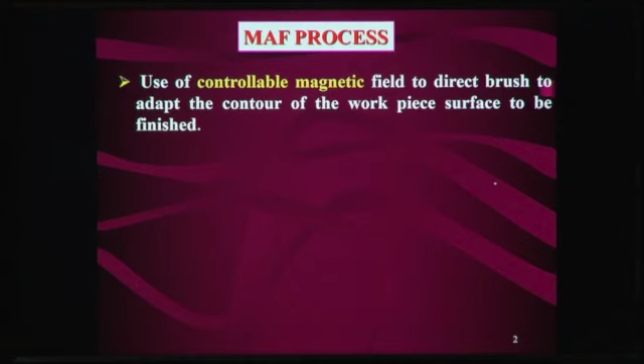In MAF process, a controllable magnetic field is used to direct the brush to adapt to the contour of the workpiece surface to be finished, and the nature of the brush is flexible. This flexible brush means it can polish any kind of complex freeform surface, and can access surfaces where conventional tools are hardly applicable, such as inside pipes or bendings.

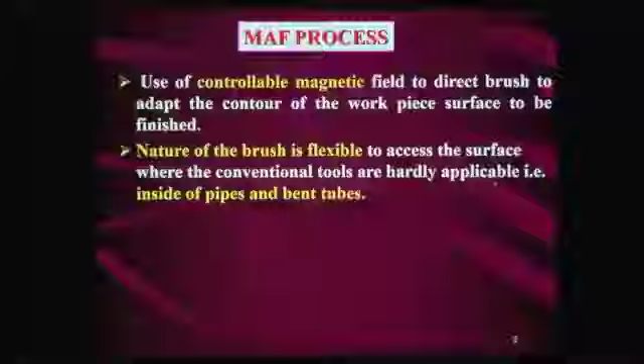For example, if you want to polish the internal surface of a tube, any conventional polishing process is difficult to use there or in any inaccessible areas. So in those inaccessible areas, a magnetic abrasive finishing process can be used to polish.

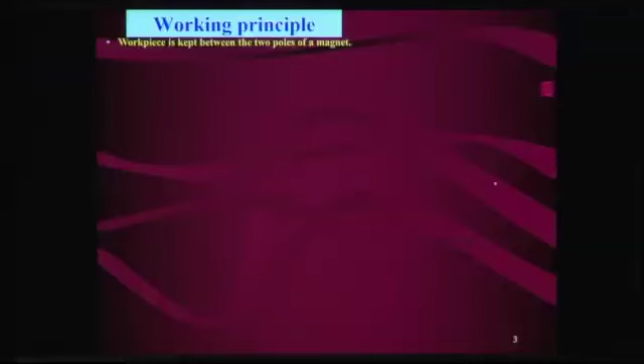So what is the working principle? The workpiece is kept in between the two poles of the magnet. The cutting force is controlled by the magnetic field generated by an electromagnet, or you can use a permanent magnet. Nowadays very high strength permanent magnets are available, like neodymium iron boron, and using this with the highest grade, you can get up to 0.6 Tesla magnetic field.

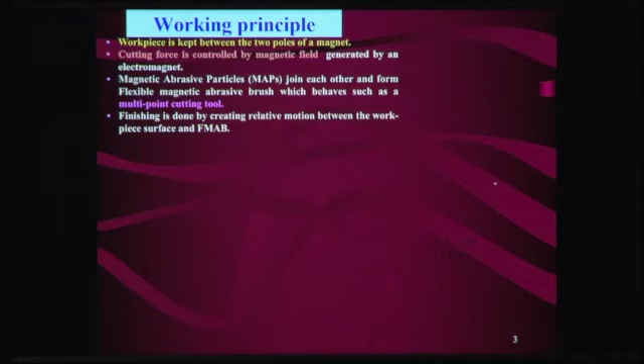So you can use an electromagnet or a permanent magnet. The advantage of an electromagnet is that by changing the current, you can change the magnetic field, which is not possible with permanent magnets. These magnetic abrasive particles join each other and form a flexible magnetic abrasive brush, which behaves as a multi-point cutting tool, and finishing is done by creating relative motion between the workpiece surface and the flexible magnetic abrasive brush.

These flexible magnetic abrasive particles are actually iron particles, 99.9% pure iron particles, and abrasive particles are mixed with these iron particles to make a homogeneous mixture. Some binding material, like binding fluid or grinding fluid, is mixed to bind these abrasive particles with the iron particles.

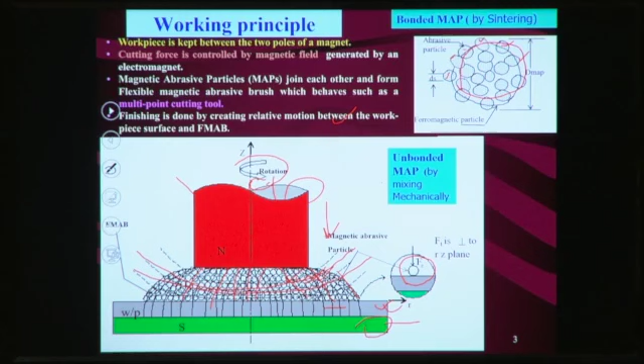There are different configurations of the magnetic abrasive finishing process. I already told you that either cylindrical workpieces or flat workpieces are generally polished by this process. Suppose we take a cylindrical workpiece here - this is the north pole, and its shape is hemispherical, considered to generate a uniform magnetic field on the workpiece surface.

These lines are magnetic lines of force, and perpendicular to them are the magnetic equipotential lines. So these are the magnetic equipotential lines. This is the north pole of the magnet, and this is our workpiece.

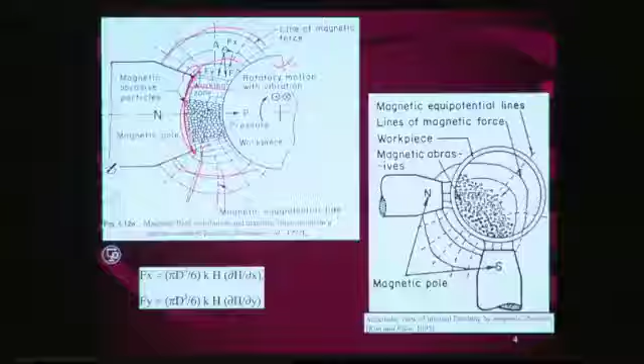Now to give the rotating motion, this workpiece is rotated with a certain high RPM. In between this north pole and the workpiece, these magnetic abrasive particles are kept. When the magnetic field is applied between the north pole and the workpiece, because of this application, the iron particles form chains along the magnetic lines of force. It creates a normal pressure into the workpiece surface, shown here as pressure P.

Because of this relative motion between the workpiece and the magnetic particles, it will remove the surface undulation from the workpiece surface. Consider a magnetic abrasive particle here - there are two forces: one is Fx, tangent to the line of magnetic force lines, and another is Fy. Because of Fx, it will indent and penetrate into the workpiece surface, and because of Fy, it will remove the surface undulations from the workpiece surface.

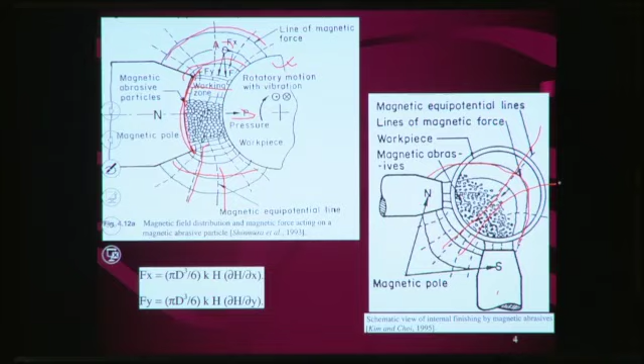This is another configuration here. North pole and south pole of the magnet are kept perpendicular to each other. This is the magnetic force lines, and these are the magnetic equipotential lines. There are other configurations also.

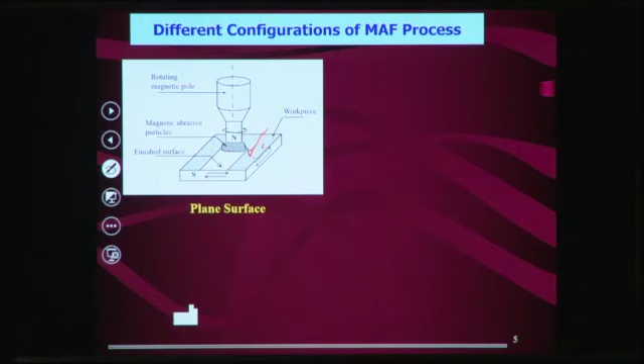In this configuration, flat workpieces are polished. This is the north pole of the magnet, and this workpiece is a magnetic workpiece, so south pole is generated into the workpiece surface. In between this north pole and south pole, we have kept magnetic abrasive particles. The total workpiece is given X and Y movement to polish the entire workpiece surface.

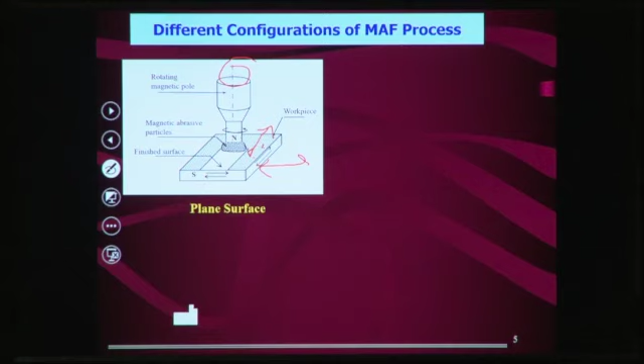At the same time, this magnet is also rotated with a certain RPM to give relative motion between the abrasive particles and the workpiece surface. This is another configuration of the magnetic abrasive finishing process.

Here a cylindrical workpiece is polished. This is the south pole and this is the north pole of the magnet, and this is the workpiece. It is rotated with a certain RPM, and these are the magnetic abrasive particles.

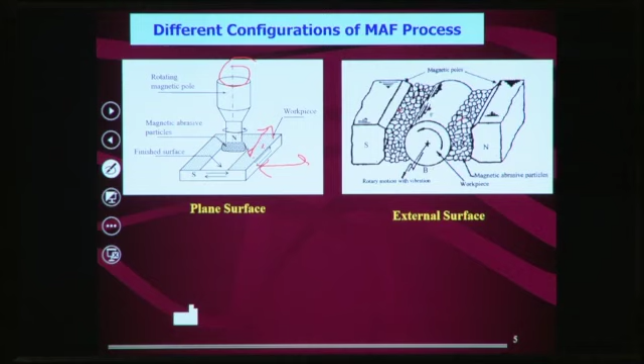There is another configuration here using an electromagnet - north pole and south pole are perpendicular to each other. Here we are polishing the external surface of this workpiece, and also the external surface of this cylindrical workpiece. This kind of magnetic abrasive finishing process can be retrofitted into a lathe machine by fixing the workpiece into the tailstock and headstock, and another arrangement for fixing the magnets.

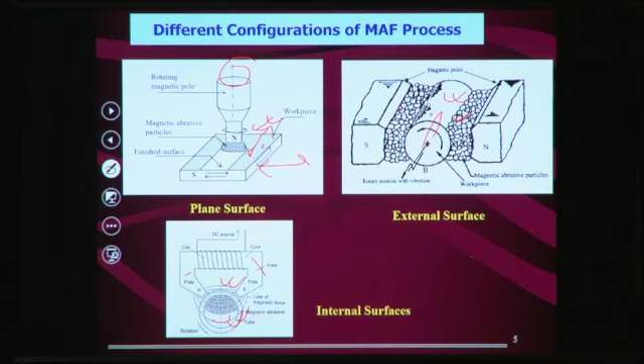In this configuration, the internal surface of this cylinder is polished by the magnetic abrasive finishing process. Here also the workpiece is rotated with a certain RPM, and the north pole and south pole are fixed here. There are different other configurations too.

Here 4 magnets are kept just outside the workpiece. This work was done by Hitomi et al., where ceramic pipes are polished - specifically the internal surface of the ceramic pipes. Here also the North Pole and South Pole are perpendicular to each other.

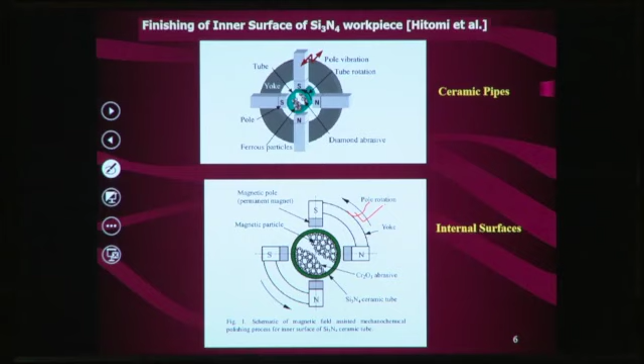This yoke is connected to increase the magnetic field, and this total yoke along with the permanent magnets is rotated. In this case permanent magnets are used, whereas in the earlier case electromagnets were used. These ceramic pipes' internal surfaces are polished by this magnetic abrasive finishing process.

Why is rotation of these abrasive particles in the brush important? Rotation gives relative motion between the abrasive particles and the workpiece. Without this rotation there would not be any tangential force, only normal force. This normal force is required for indentation or penetration into the workpiece surface, and because of rotational motion, a tangential force is generated. This tangential force is required for

cutting the surface undulations. The force required to remove material is given by shear tau, the shear stress of the workpiece material, multiplied by AP, the projected area of penetration of the abrasive particles into the workpiece surface due to normal indentation force. This gives the required force for polishing to take place. When this required force equals the tangential force because of rotation, equilibrium condition occurs, and finishing is about to start.

When the tangential force is greater than the required shear force, shearing or cutting action will take place and material removal will occur. But when the required force is greater than the applied tangential force, no cutting action will take place. So these are the three different conditions.

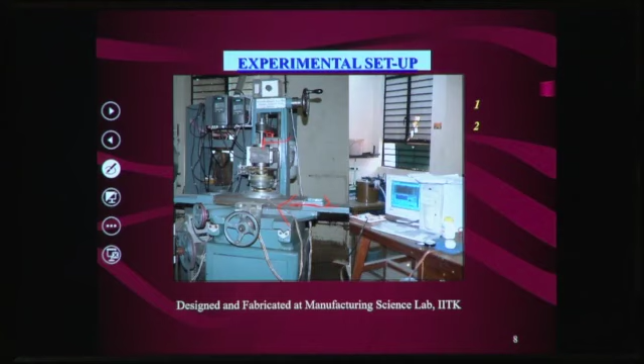This wheel is used for maintaining the gap between the magnet and the workpiece. A timing belt is used so that there is no delay or friction between this shaft and the motor shaft. This is the spindle. The slip ring is used to give current to this motor, to give current to this electromagnet.

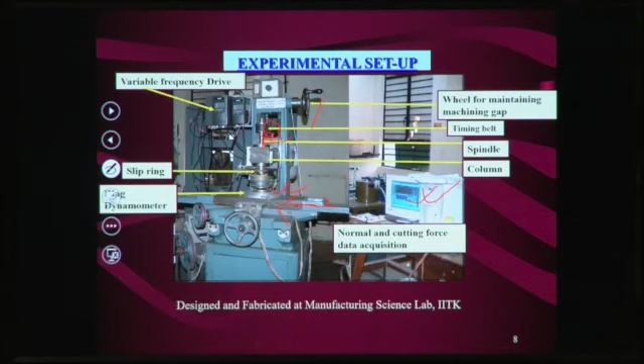There is a dynamometer, a fabricated, custom-made dynamometer, used to calculate the normal force and the tangential cutting force. There is also a data acquisition system used for measuring this cutting force, the normal force, and the tangential force.

These are the ferromagnetic particles, iron particles of 300 mesh size, and these are the abrasive silicon carbide particles, with 600 mesh size.

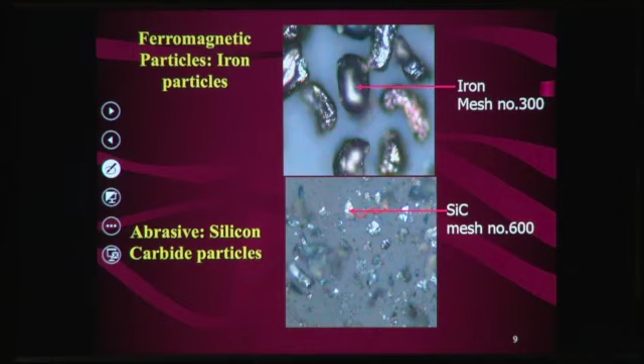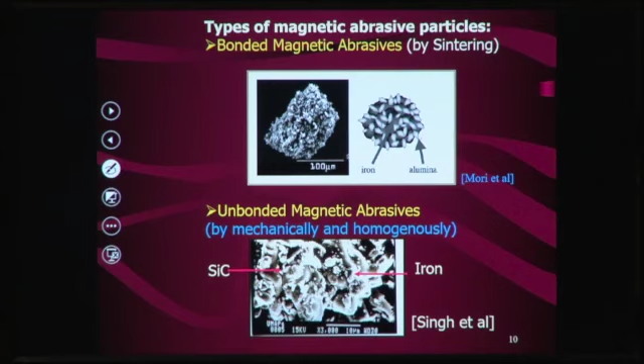Types of magnetic abrasive particles have already been shown. This is the bonded type magnetic abrasive particles, and this is the unbonded type. In the unbonded type, these abrasive particles and magnetic particles are homogeneously mixed with grinding oil.

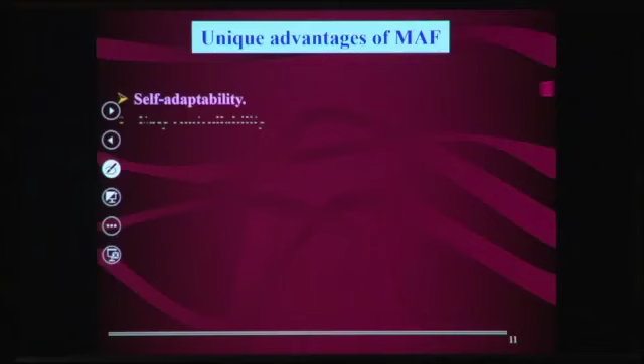What are the unique advantages of this magnetic abrasive finishing process? Self-adaptability is one of the advantages, meaning you can polish any kind of complex free-form surface. The magnetic abrasive fluid will take the shape of the surface to be polished, which is why it is called self-adaptability.

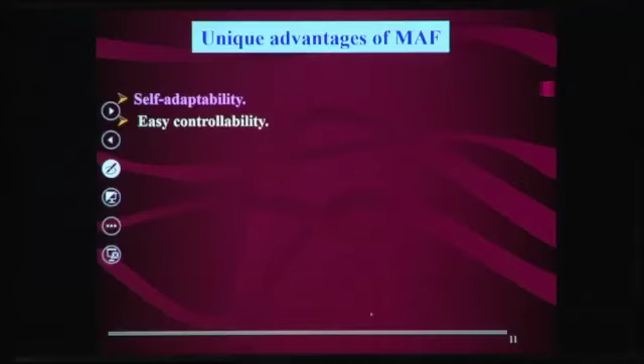The bonding strength of these magnetic abrasive particles is controlled by magnetic force. By changing the current to the electromagnet, the strength of the bonding of magnetic abrasive particles can be changed, giving easy controllability and surface finish up to the nanometer level.

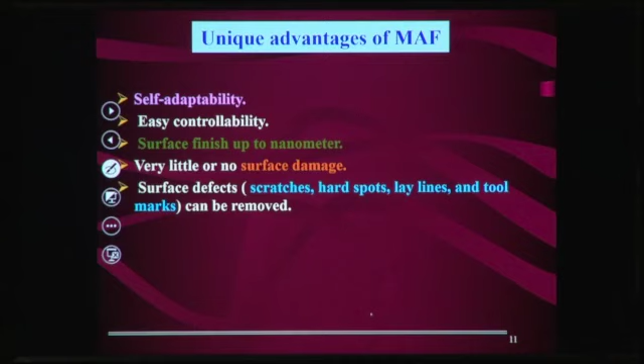From this process you can get surface finish up to the nanometer level, with very little or no surface damage, because whatever heat is generated is very minimal in the magnetic abrasive finishing process. Surface defects like scratches, hard spots, lay lines, and tool marks can also be removed by this process.

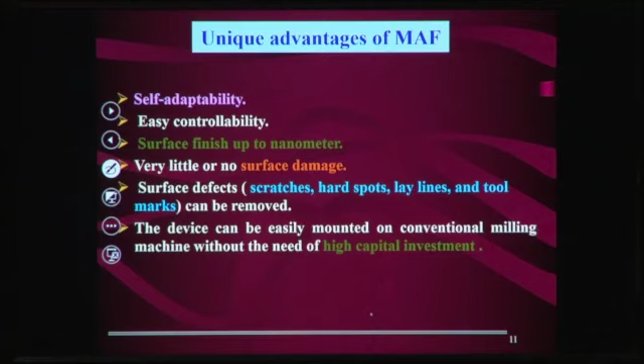These devices can easily be mounted on a conventional milling machine without the need for high capital investment. So any kind of milling machine, grinding machine, or lathe machine can be converted into a magnetic abrasive finishing process. This process actually started in the USA.

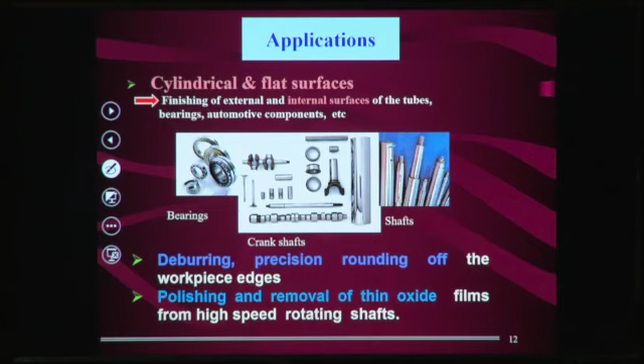Cylindrical or flat workpieces can be polished. Finishing of external or internal surfaces of tubes, bearings, and automotive components can be done. These are crankshafts, bearings, and shafts. External or internal surfaces of shafts can be polished by this process.

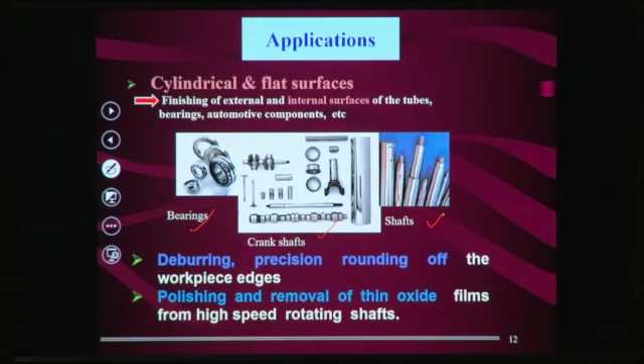Other applications include deburring, precision rounding off workpiece edges, and polishing and removal of thin oxide films from high-speed rotating shafts, all of which can be done by this magnetic abrasive finishing process.

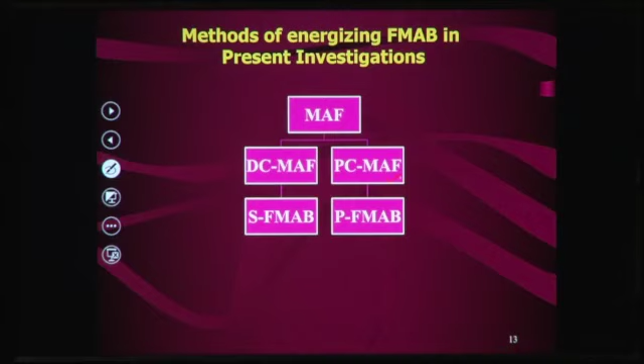Regarding the method of energizing flexible magnetic abrasive finishing in the present investigation, there are two types. In one case, constant DC current is used, called direct current magnetic abrasive finishing, where a static flexible magnetic abrasive brush is generated. In the other case, pulsating DC current is used, called pulsating current magnetic abrasive finishing, or pulsating flexible magnetic abrasive brush.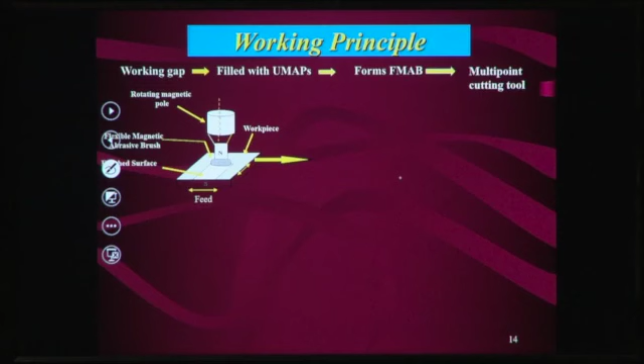You can see this permanent magnet is used here, and electromagnet is used here. In this electromagnet, at the center is the north pole, and at the end is the south pole. Here is the coil - two coils are used for this kind of magnet.

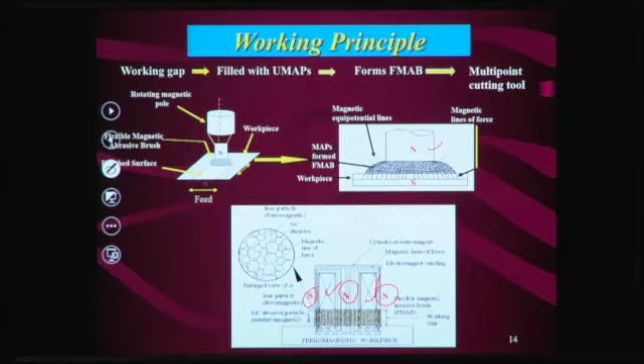Here you can see the magnet, electromagnet here, and this is the workpiece here, and in between this workpiece and electromagnet. So this is the workpiece and this is the electromagnet. Here flexible magnetic abrasive particles are actually kept.

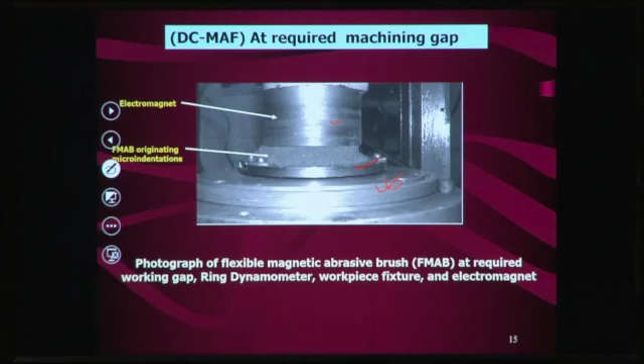Photograph of this flexible magnetic abrasive brush and required working gap, ring dynamometer. This is the ring type dynamometer used. Strain gauge type dynamometer is used for measuring the normal force and tangential force. This is the workpiece fixture and electromagnet. These are the instruments required for analysis and during machining of the magnetic abrasive finishing process.

Surf analyzer is used for measurement of the surface roughness, electronic balance for measuring the initial workpiece weight. Optical microscope is used for seeing the top surface or surface topography of the workpiece. Scanning electron microscope and atomic force microscope are used for seeing the surface profile.

DC power supply is used for the electromagnet. Pulse power supply is also used for the electromagnet. Digital oscilloscope is used to record the pulse, current and voltage. Gauss meter is used to measure the magnetic field in the machining zone, and ultrasonic cleaner is used for cleaning the workpiece.

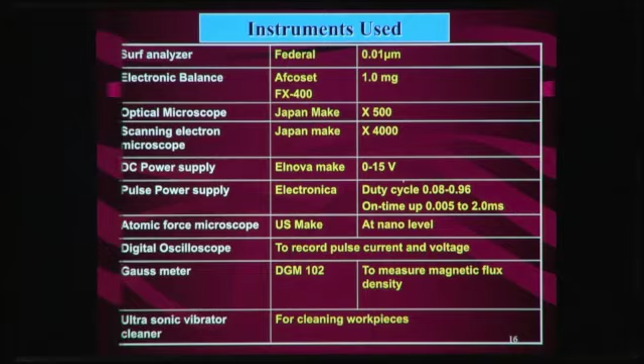Measurement of magnetic flux density: here is the Gauss hall probe of this Gauss meter, kept in between the tool and the workpiece. So this is the workpiece here, this is the tool here. In between this tool and workpiece, this Gauss meter is used.

So it's the exploded view or schematic view. This is the hall probe of this Gauss meter, and this is the finishing zone here. It is used for measuring the magnetic field.

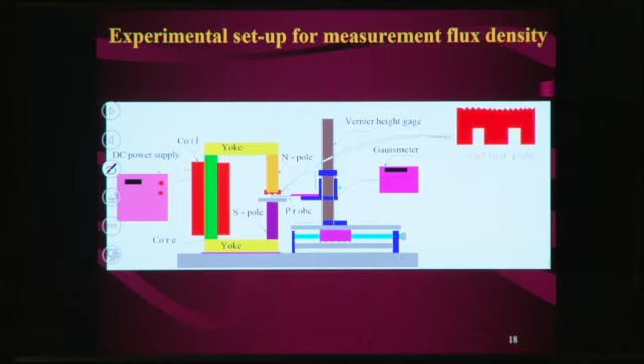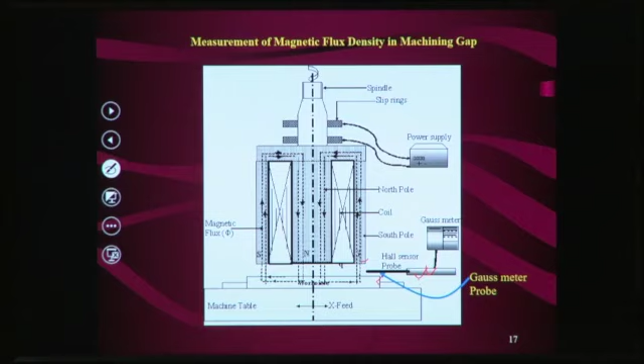With the increase in current, from the center to the outer periphery of this electromagnet, you can see how this magnetic field is varying with the increase in current. With lower current, the magnetic field flux density is less. With higher current, magnetic flux density is more. So with increasing current, the magnetic flux density is increasing at a certain point.

Then with different gap, different magnetic flux density is observed. So when your gap is less, then magnetic flux density will be high. When gap is more, your magnetic flux density will be less.

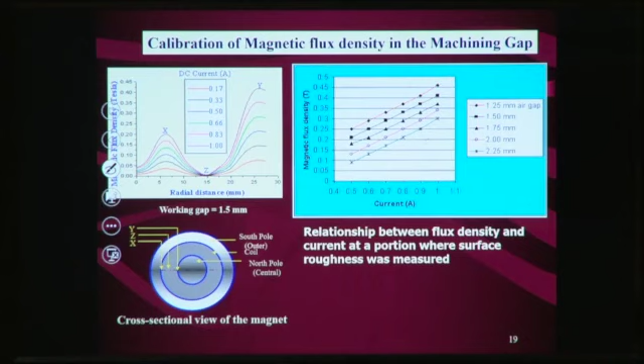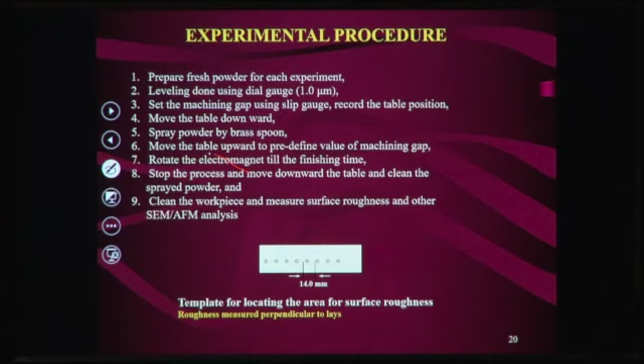Stop the process and move the table downward, clean the sprayed powder and clean the workpiece, then measure the surface roughness using the surf analyzer, and perform SEM and AFM analysis.

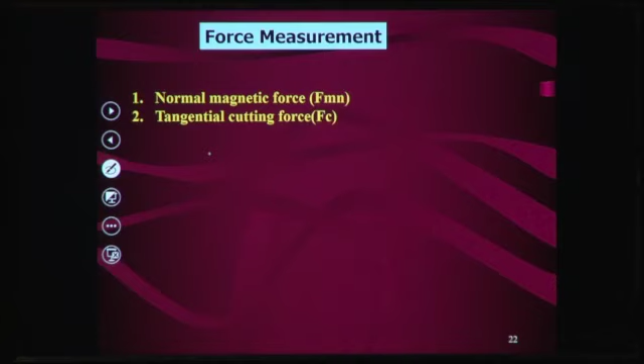Force measurement: there are two forces, one is the normal force, another is the tangential cutting force. This tangential cutting force is responsible for the cutting operation.

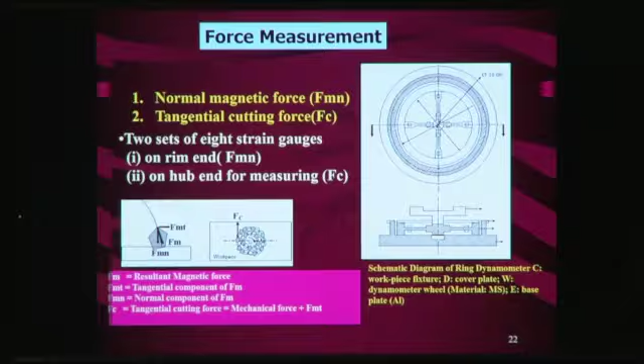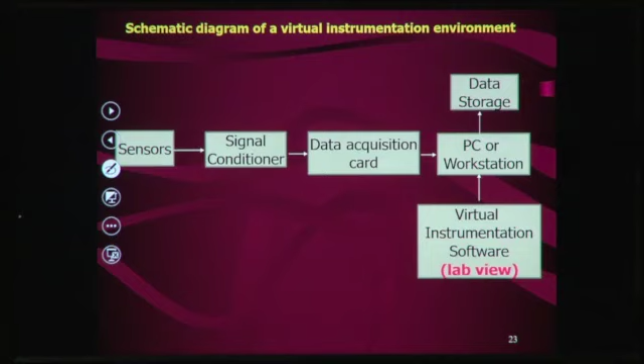The sensor signals go from the signal conditioner to the data acquisition system, then to the PC and data storage, along with virtual instrumentation software LabVIEW. From there, your force is actually measured.

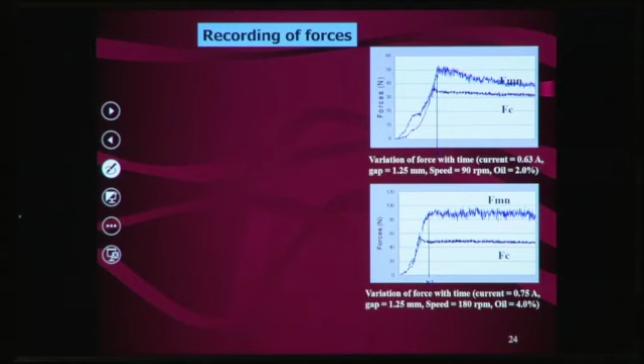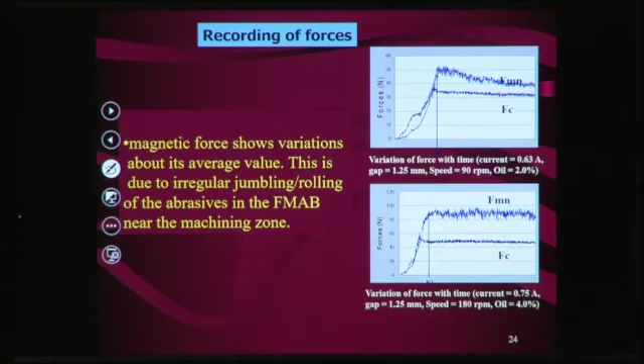For 0.75 ampere current, magnetic force shows variations about its average value, and this is due to the irregular jumbling or rolling of the abrasive in the flexible magnetic abrasive brush near the machining zone.

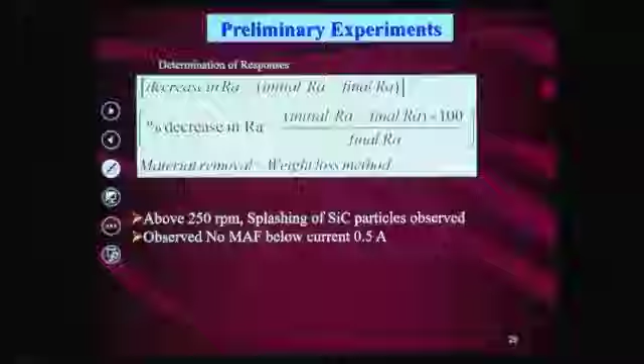Experimentation using static flexible magnetic abrasive brush - preliminary experiment. The responses we calculated are: decrease in RA, which is initial RA minus final RA; percentage change in RA, which is initial RA minus final RA divided by final RA surface roughness multiplied by 100; and metal removal rate, which is the weight loss.

Above 250 RPM splashing of silicon carbide particles are observed at 250 RPM of this magnet, and we observed no magnetic abrasive finishing action below...

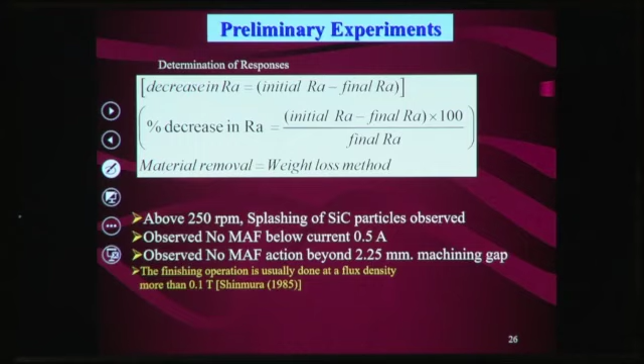We observed no abrasive finishing action below current of 0.5 ampere, and no magnetic abrasive finishing action beyond 2.25 millimeters. So when the gap is more than 2.25 millimeters, there is no magnetic abrasive finishing. The finishing operation is usually done at flux density more than 0.1 Tesla.

These are the parametric results for the magnetic abrasive finishing process. With the increase in magnetic flux density, you can see magnetic abrasive pressure also increases.

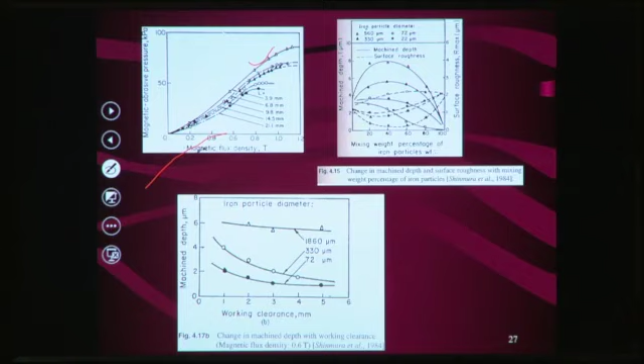Here you can also see the mixing weight ratio. Mixing weight ratio increases with increase in machined depth, which increases with increase in the mixing weight percentage of iron particles.

With the increase in finishing time, initially the finishing rate is very high, and then after that it almost stalls.

What happens is these surface undulations are triangular shape. When the abrasive particles cut the surface undulations, the shape of these triangular peaks becomes plateau. It requires higher force to cut this bigger size plateau. That's why initially surface roughness improvement is very high, but later, because of this bigger plateau, the removal rate and finishing rate reduce with time.

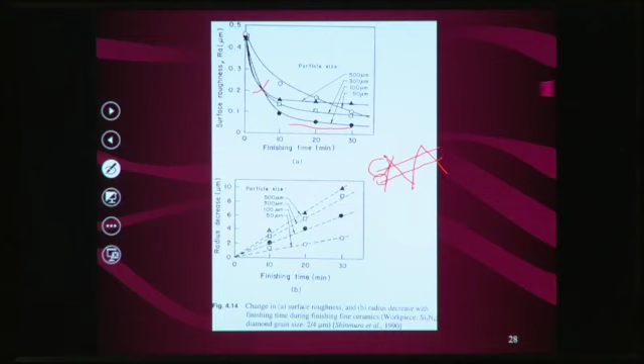Radius of the workpiece decreases with the finishing time.

There are two types of abrasive particles: one is unbonded type and another is bonded type. Bonded type abrasive particles give higher surface finish, but their metal removal rate is less.

In unbonded type abrasive particles, surface roughness improvement is lower, but their metal removal rate is high. So unbonded type magnetic abrasive particles are used for higher metal removal rate, and bonded type magnetic abrasive particles are used for getting higher surface finish.

When magnetic flux density increases, machined depth also increases. If magnetic flux density increases, the abrasive and iron particles will make strong chains, and abrasive particles will be held with a higher force.

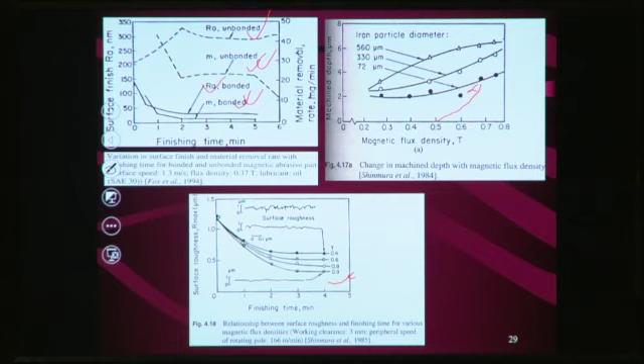With the increase in finishing time, surface roughness also reduces. Initially, the surface finish started on a grinded workpiece with 0.49 micron workpiece surface roughness. After the flexible magnetic abrasive finishing process is carried out on the same workpiece, surface roughness is reduced to 0.28 micron.

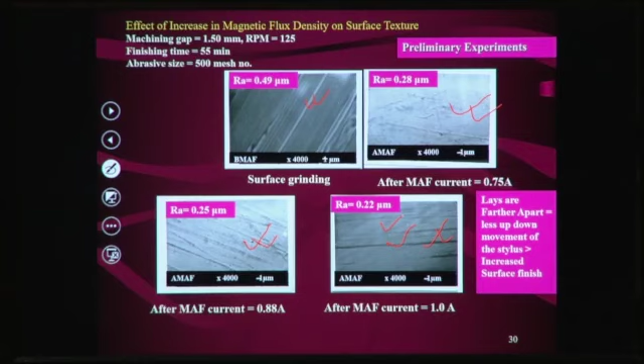After the magnetic abrasive finishing process at 0.88 ampere magnetic field, surface roughness is further improved to 0.25 micron. At 1 ampere current, surface roughness is further improved to 0.22 micron. But while all these surface roughness improvements occur, the grinding marks are not permanently removed.

Okay, so these are the AFM (atomic force microscope) results. So I told that these grinded workpieces have a triangular cross section. Here you can see this kind of triangular cross section of this grinded workpiece.

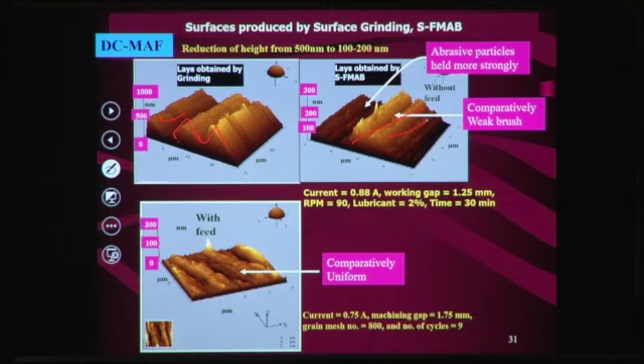So this grinded workpiece, when it is polished by static flexible magnetic abrasive finishing process, the surface undulations you can see here are removed. Now when this machining or finishing is carried out for a longer time, you can see the surface undulations are almost removed.

Okay, so analysis of the magnetic abrasive finishing process. So I told that if you keep these magnetic abrasive particles in between the magnet and the workpiece, there is a magnetic pressure actually generated on the workpiece surface. So how to calculate the pressure?

So this machining pressure between the abrasive particles and the workpiece, the machining pressure by the magnetic abrasive particles on the workpiece surface, can be calculated as P equals mu0 Ha squared by 4, into 3 pi mu r minus 1, into W, divided by 3 into 2 plus mu r plus mu r minus 1 into W. Here mu0 is the permeability of air, mu r is the relative permeability of pure iron, and Ha is the applied magnetic field.

And W is the volume ratio of iron in the magnetic abrasive particles.

Now stock removal can be calculated as M with time t equal to del m into n into capital N. Here small n is the number of cutting edges of magnetic abrasive particles simultaneously acting on the surface, and capital N is the number of active magnetic abrasive particles.

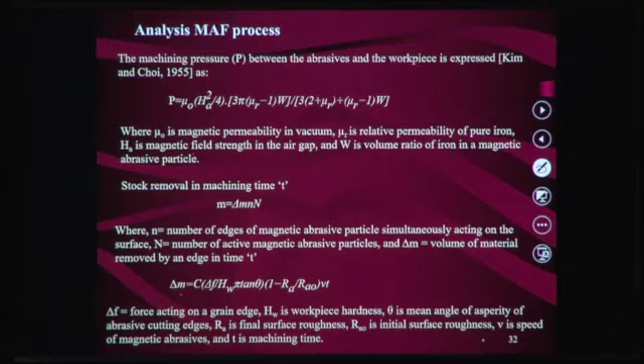So using this above model, surface roughness and stock removal in the internal surface have been computed, and comparison of computed and experimental results are found satisfactory.

Okay, so these pulsating currents are actually helpful for proper mixing of these abrasive and iron particles. It helps in proper mixing of the abrasive particles and iron particles. Otherwise, whatever abrasive particles are there at the external periphery will remain the same, with no change. So for machining to take place, we need more active abrasive particles which are taking part in the polishing action.

That's why if we use the flexible magnetic abrasive brush, as the current is reducing and then jumping, again reducing and jumping, during the off time of this pulse there is a chance that the magnetic and abrasive particles will properly and homogeneously mix, and during the on time it will do the polishing action. So in this way we can increase the machining efficiency of this flexible magnetic abrasive finishing process.

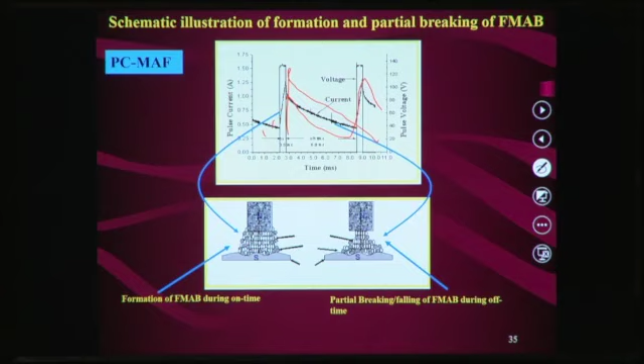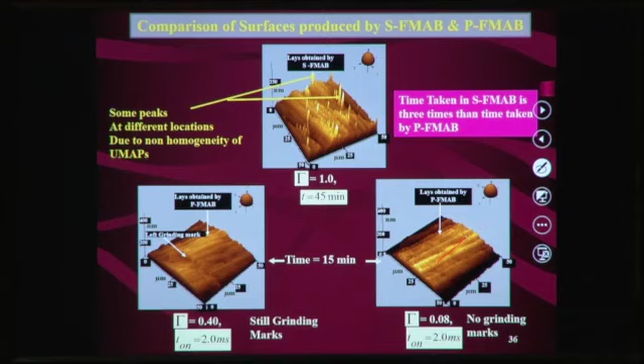Here you can see these grinding marks are almost gone. So you can expect a better surface finish by this pulsating current magnetic abrasive finishing process. Okay, thank you.